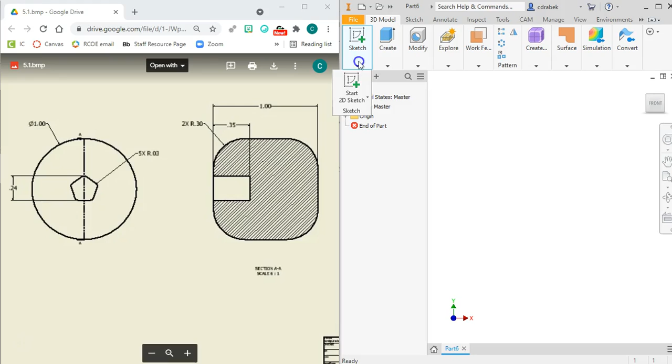So remember that if we did both of these in the same sketch, it would mean that the polygon has to cut through. It's not an option. So let's go ahead and get started. So I'm just going to start with my basic circle, and the diameter is 1 inch. And I'm going to extrude it 1 inch.

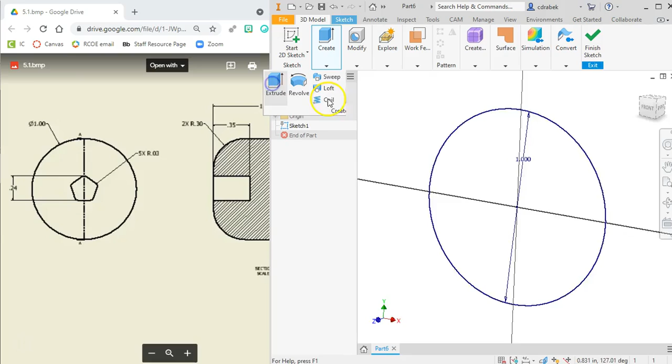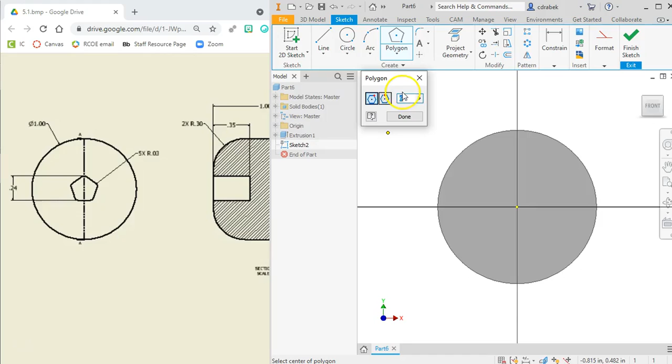So look, when you see here, now we have our rectangle. Let's go ahead and flip it back over. Let's do that polygon. Start a sketch on the surface. And if you look underneath rectangle, you'll see a polygon down here. And it's asking how many sides. 1, 2, 3, 4, 5 sides. So let's go ahead and change this to a 5 and put it on here.

Hit done. Now I want to go ahead and have the same orientation. So I need one of these to be horizontal across the bottom. So I'm going to go ahead and do a horizontal constraint. And let's choose this. Make sure you're not choosing the center point or the midpoint of that line. Choose the line itself. There we go.

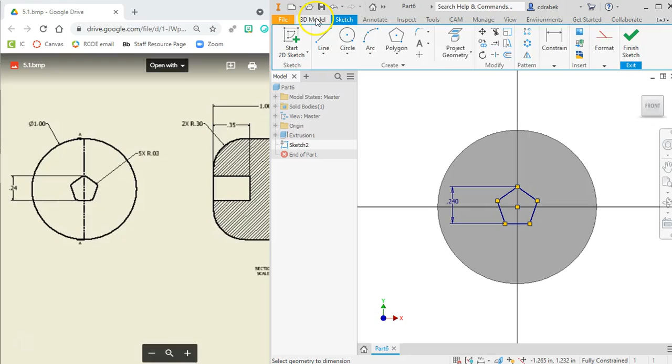And from the bottom to the top is 0.24, so let's add that. From the bottom to that top point is 0.24. Looks great, we're fully constrained. So let's go ahead and cut that in 0.35. So go to your extrude. And you need to choose that. And then we're switching it to cut. And the depth is 0.35.

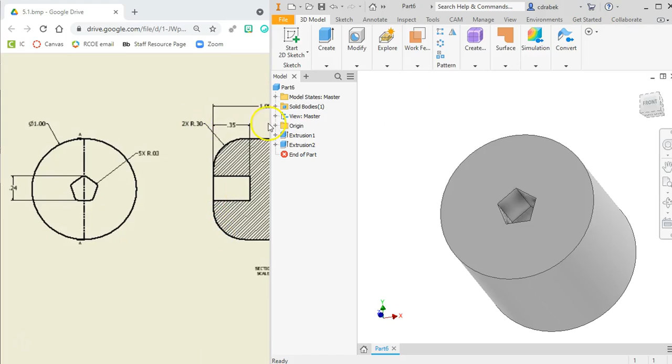So when we rotate this here, we can see what that looks like. Now on the drawing, we see these fillets here, and it's a radius of 0.3. So let's go ahead and come in and do our fillet. Put the value at 0.3, and we need to do the top and the bottom. So when we look from the side, we hit OK, you'll see that it looks the same.

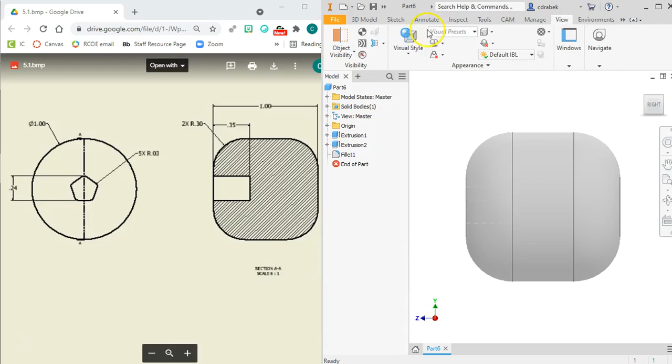Now, if we want to change our view to see that cut that we have inside there, we can do this. Let's do wireframe with hidden edges, and we can see that it's cut down in here. So that's your whole part, guys. This is part 5.1.